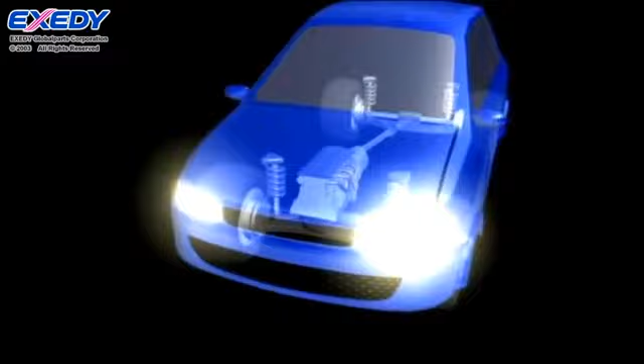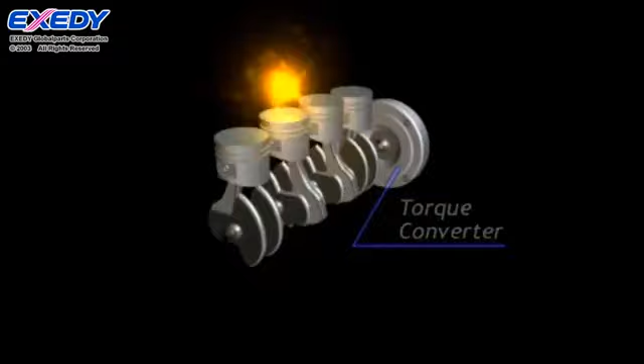Located between a car's engine and its transmission is a torque converter, which is connected to the engine through a drive plate. The torque converter is a crucial component of the drivetrain. It amplifies engine torque and transfers it to the automatic transmission.

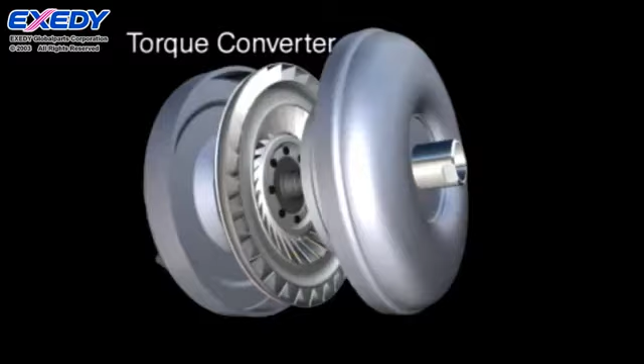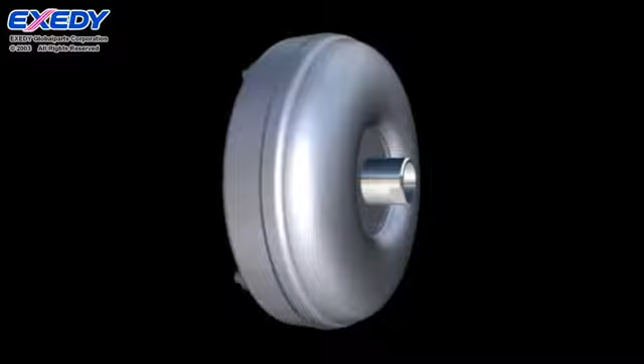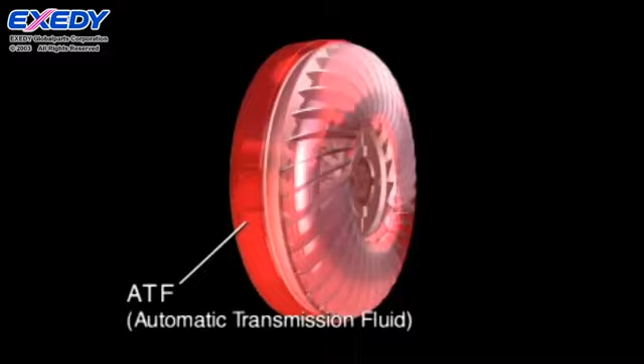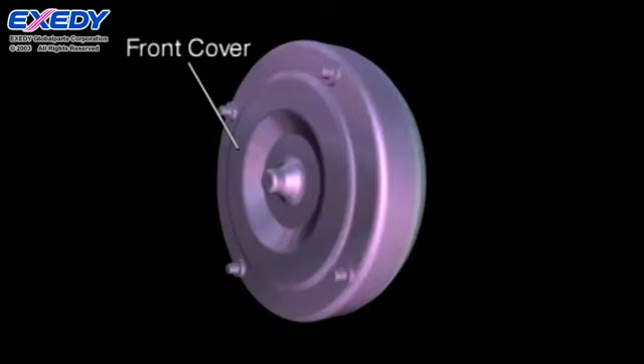A torque converter consists of 3 vaned wheels. The torque converter is filled with automatic transmission fluid from the transmission. Engine power is transmitted to the transmission via this oil. Power from the engine is first transmitted to the torque converter's front cover. Integrally connected to the front cover is a vaned wheel called an impeller, which the transmitted power causes to revolve.

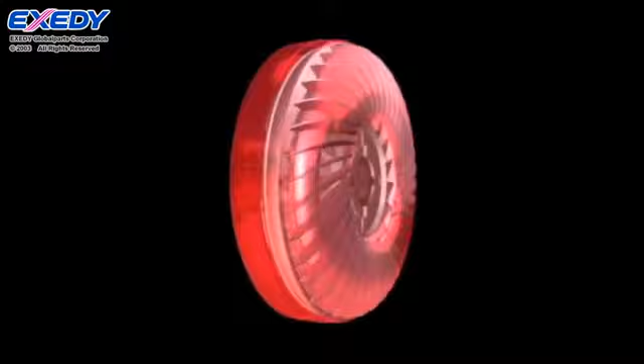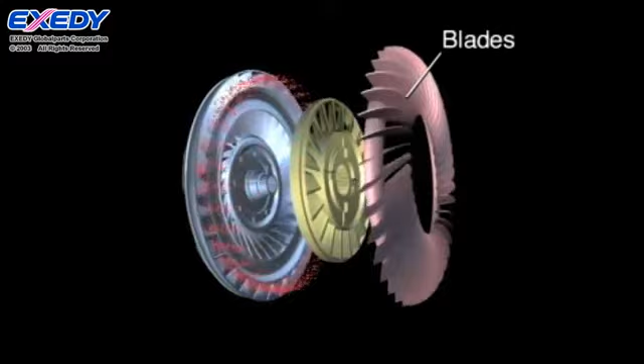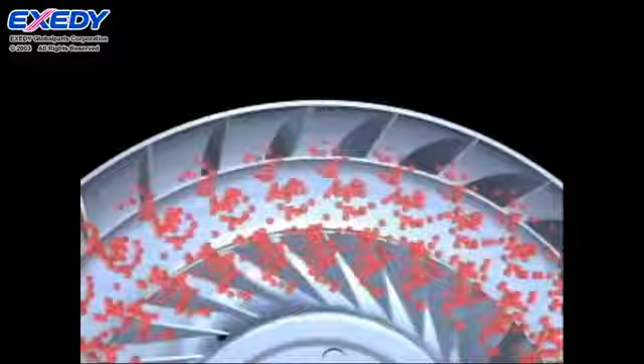The impeller blades make the oil revolve. The oil is pushed outward at high speed by the engine torque. This oil pushes against another vaned wheel called a turbine, making it revolve. Drive power is transmitted from the turbine through the input shaft to the transmission.

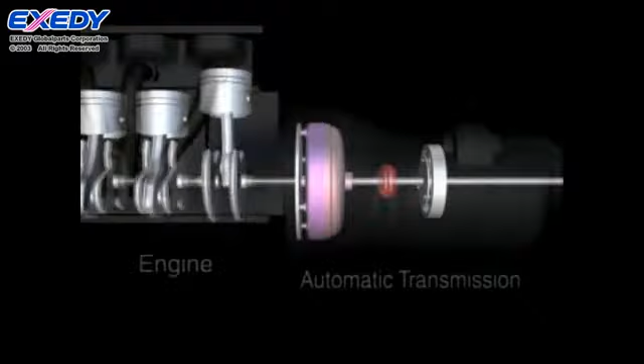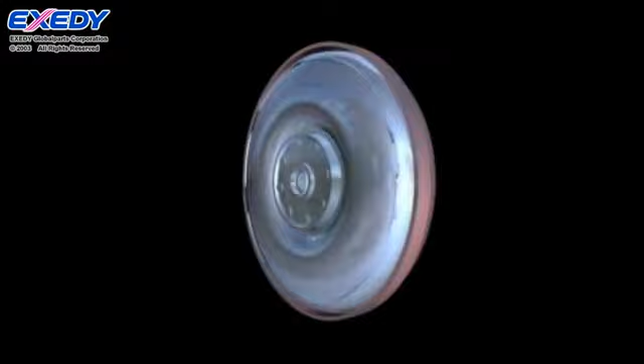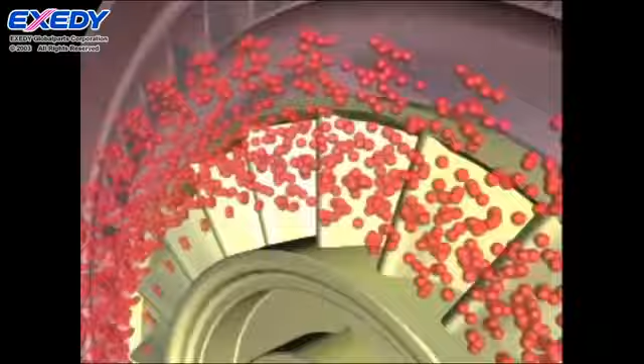Typically, this drive torque is not enough to briskly accelerate a vehicle from a complete stop. The solution to this is the addition of a component called a stator or reactor. The stator functions to smoothly return the oil from the turbine back to the impeller without any power loss. When the vehicle first starts moving, the oil flowing through the turbine next flows through the stator and is returned to the impeller flowing in the same rotational direction, amplifying the power used to turn the turbine.

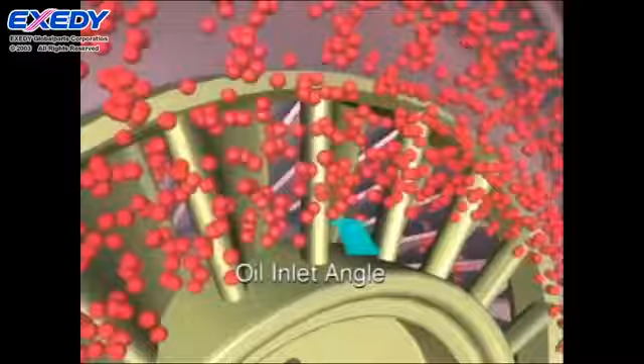As the vehicle accelerates and the speed of the turbine increases, the stator becomes a resistance that makes the oil flow less efficiently, dissipating power. For this reason, a one-way clutch is built into the stator. As the speed of the turbine increases, the stator revolves without creating any resistance.

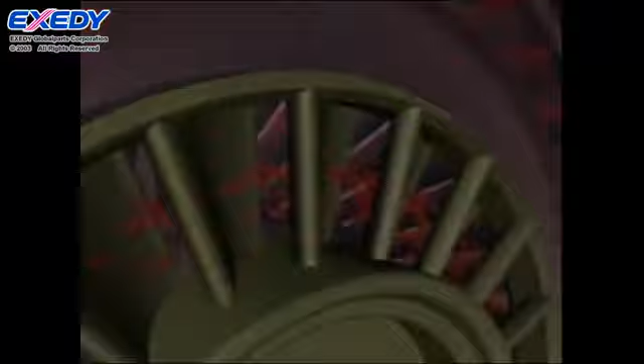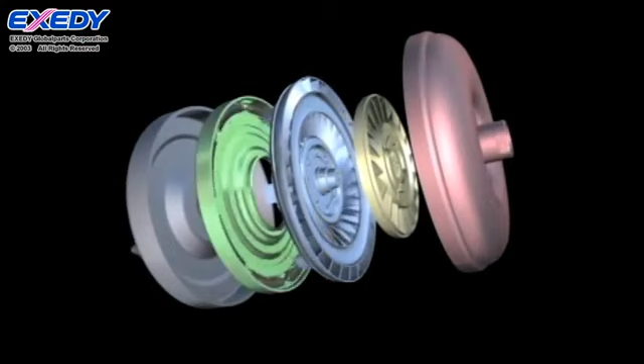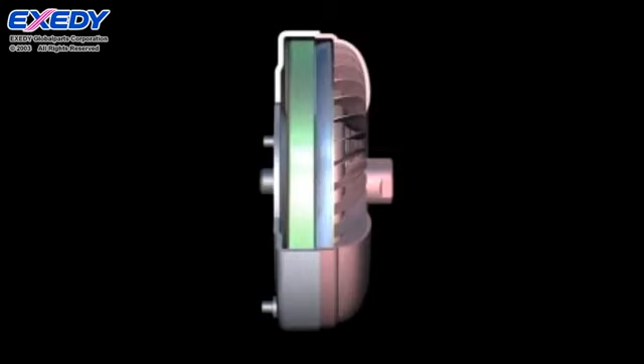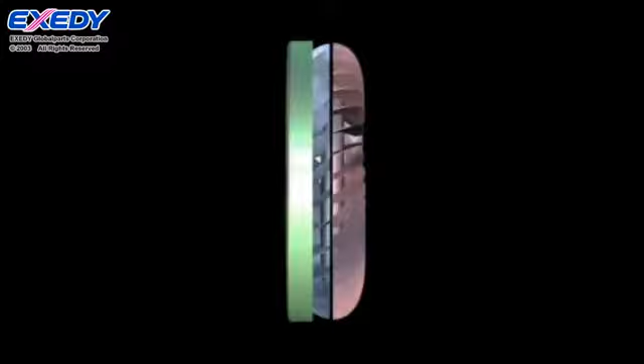Some transmission loss is unavoidable in a torque converter that uses oil to transmit drive power. To reduce loss, a damper-equipped lockup clutch is used to enable direct connection. The damper-equipped lockup clutch is installed between the front cover and the engine side of the turbine and moves in the axial direction in accordance with changes in oil pressure. A change in oil pressure presses the damper-equipped lockup clutch against the front cover. Through this action, the drive power transmitted to the front cover is directly transferred from the damper-equipped lockup clutch to the transmission via the turbine.

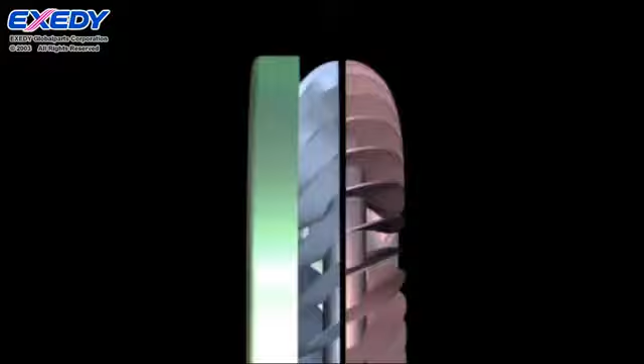But because the engine and transmission are directly connected, fluctuations in the engine's rotational speed are also transmitted to the transmission. This causes the drivetrain to generate vibration and resultant noise. A spring built into the damper-equipped lockup clutch absorbs the vibration so it is not transmitted to the transmission.

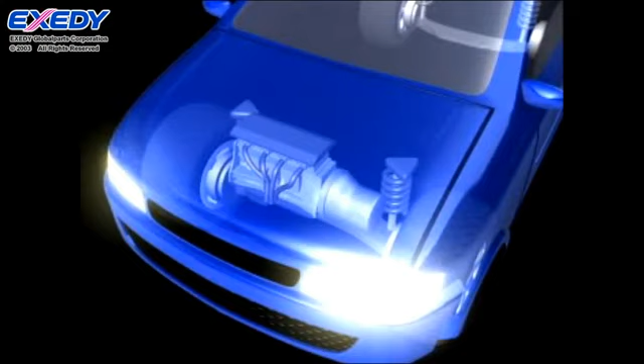Today, the growing number of front-engine, front-wheel drive vehicles which have a transversal powertrain layout has generated demand for elliptical-type torque converters because they take up less space in the axial direction. The recent trend toward 5- and 6-speed automatic transmissions has created a need for super-elliptical torque converters that take up even less axial space to allow more space for the transmission.

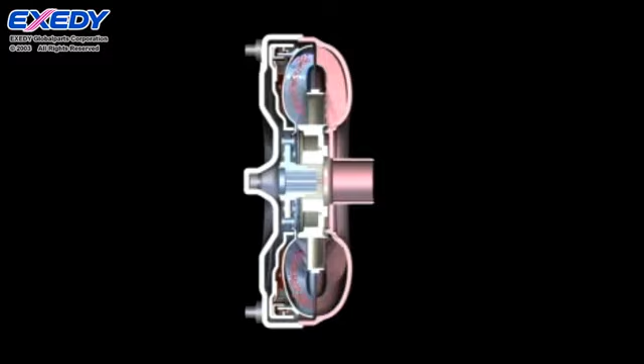This is a cross-section of a torque converter. This is where the oil revolves. Oil flows more easily when the torque converter is round. With an elliptical torque converter, the flow is not as smooth, reducing torque converter performance. EXEDY is now developing a high-performance, compact elliptical torque converter that offers extremely smooth oil flow.

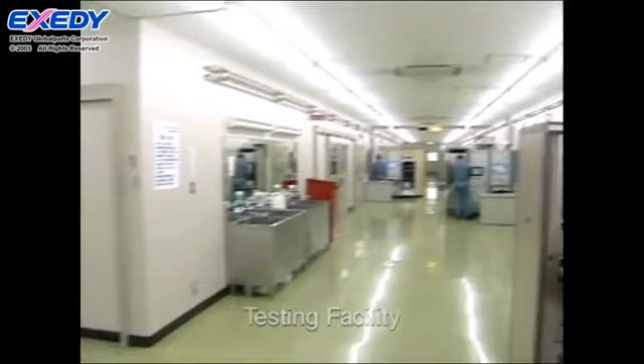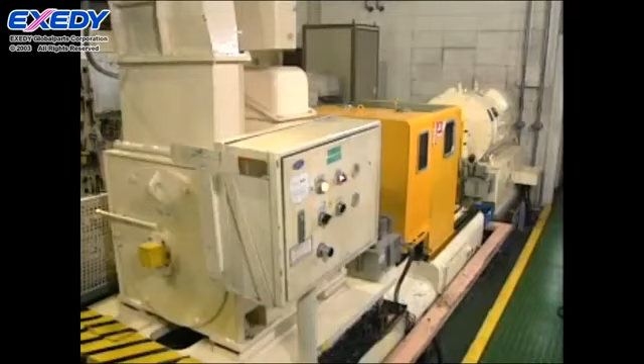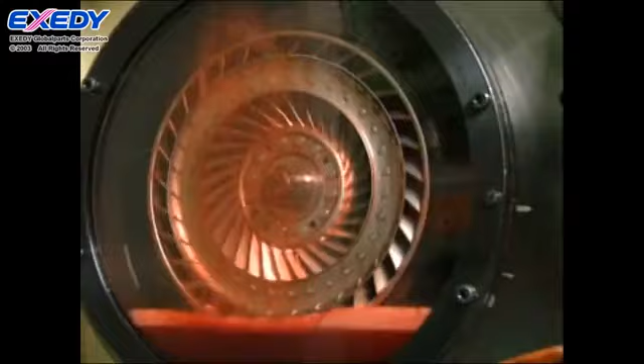Research is now underway to determine how to achieve smooth oil flow despite the difficulties presented by an elliptical shape. As a torque converter revolves at high speed and its blades are three-dimensional, it is extremely difficult to examine the oil flow inside. Extensive experimentation has provided EXEDY with a wealth of data on the oil flow inside a torque converter.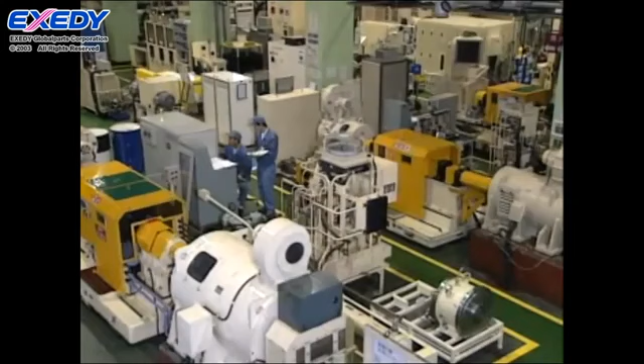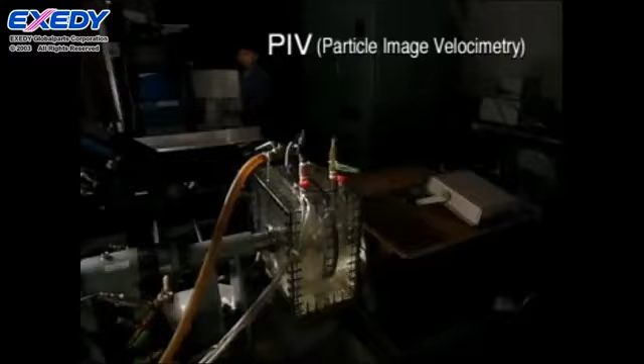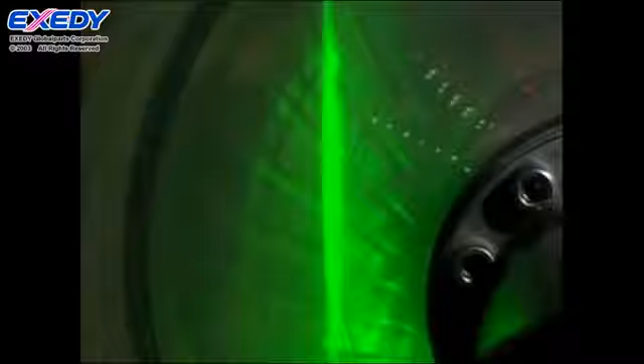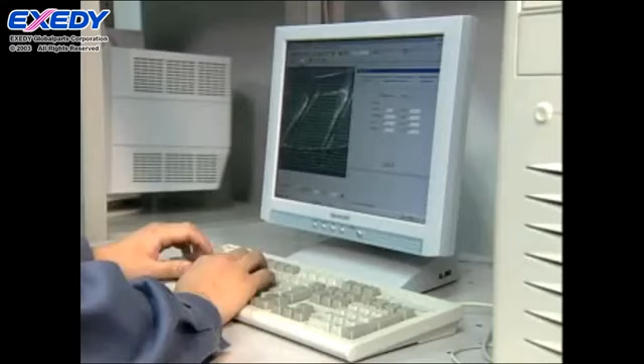We also utilize a method called PIV to measure the oil flow inside a torque converter. This method employs a transparent torque converter and special particles in the oil, which are illuminated by laser to visualize the oil flow. Previous experimental methods yielded only inferred values for oil flow. Visualization using the PIV method provides data that is much more precise.

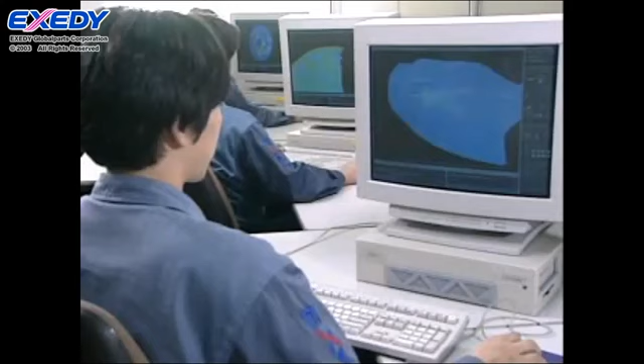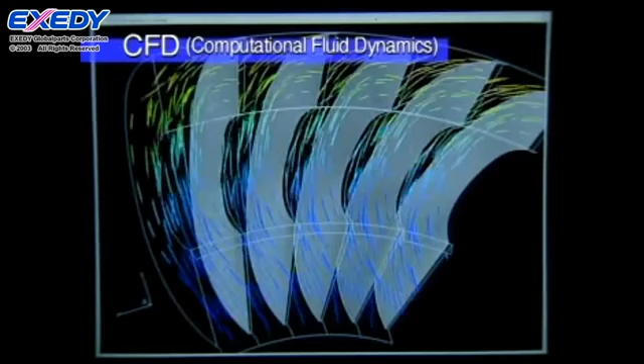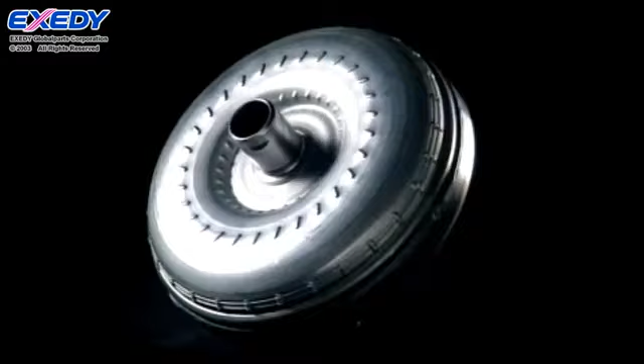Utilizing the huge volume of data obtained through this cutting-edge technology, together with advanced simulation technology, EXEDY is able to develop high-efficiency, high-performance torque converters much more quickly. Computer programs that simulate fuel economy and acceleration performance enable EXEDY to design converters that perfectly match a vehicle's requirements. EXEDY is also utilizing these technologies to develop a very compact starting device consisting of a torque converter that incorporates a high-performance damper.

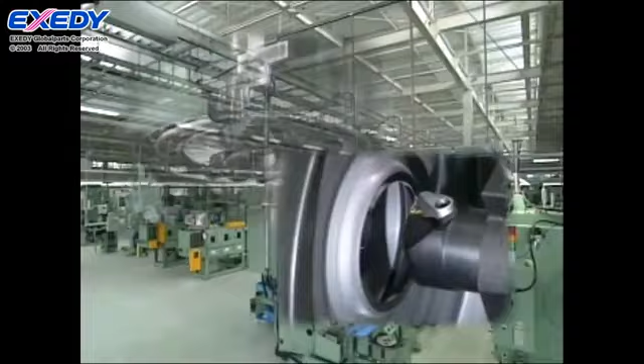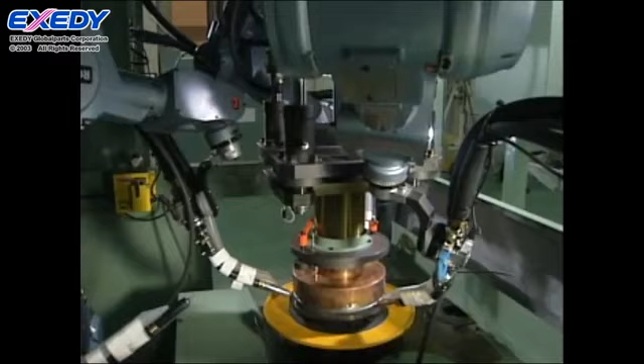Offering performance and quality to satisfy requirements around the world. EXEDY will continue meeting the challenge as drivetrain specialists, powering the further evolution of the automobile and today's motorized society.